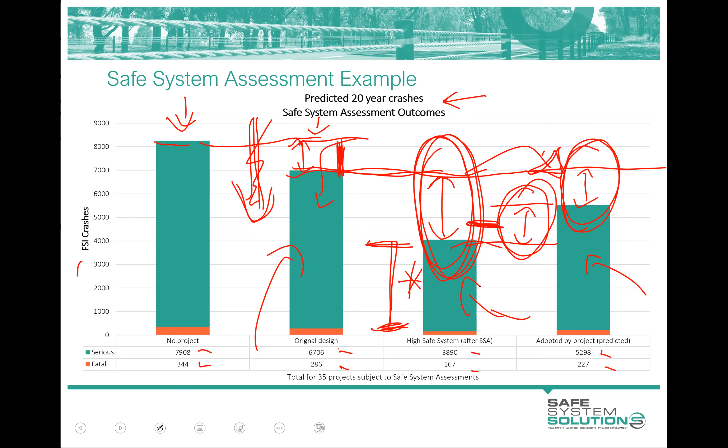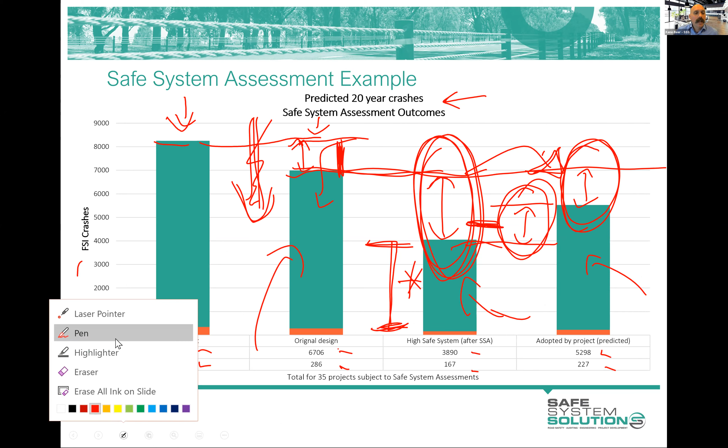Can you tell us what some of the factors are that influence the adopted by the project versus the high safe system assessment? Yeah, great question. So, the things we were seeing. I'm just going to clear my slide so it's a bit easier to read. So we're really talking here about, okay, the safe system assessment suggested something, and the project said, well, we're going to do some of that. We can't do it all.

And the ones that were adopted quite readily were often things like continuous barrier systems. So maybe the project opted for minimum clear zones, but the safe system assessment said, actually, you'll get far better benefit if you do continuous barrier systems along the road instead of the clear zones. So those things were adopted.

Where it often came to a challenge was minor side roads, and the safe system assessment recommending either closing those roads and making people go around to the grade separated interchanges, or recommending roundabouts or acceleration lanes at those minor intersections. So that was one.

Another one that was not accepted in quite a few of them were large signalised intersections, and the safe system assessment basically was saying you need to lower speeds through these, and some options are to do a raised safety platform, a signalised roundabout, or to grade separate. And then there were also supporting options like lower speed limits, red light speed cameras, and these sorts of things. So most of the time they opted for these lower order supporting treatments at these large signalised intersections.

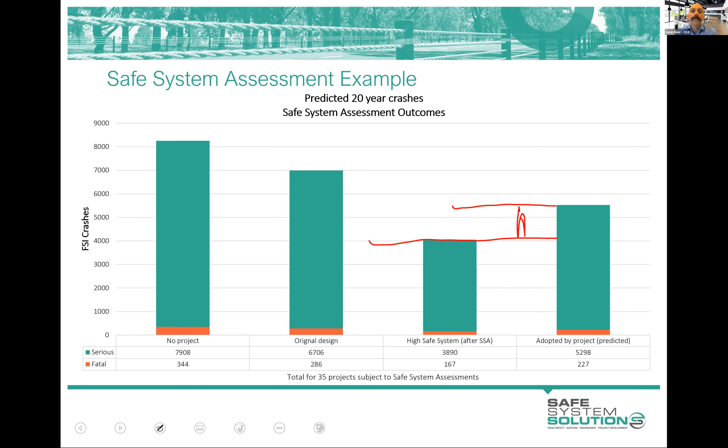Thanks, Ken. I think you can carry on. Okay. How are we going on time? Oh, yeah, beautiful. So just a couple of dot points here, a few dot points.

Safe system assessment benefits: a great way to determine projects' alignment with safe system principles. I think you've seen that. And it's a good methodology to compare project options or project design options. So it's a great way when you're in your optioneering phase and you go, we've got 4 options on the table here, and you can do those safe system assessments, you can get scores, you can see areas where projects are better and worse in terms of different road user types, different crash types.

Great way to obviously move projects closer to those safe system objectives of eliminating death and serious injury. Good method to assist planners, designers, and project managers to move the safe system approach from theory to practice. And I think that's probably its best application, because people are generally on board with the safe system at a philosophical theory level. Like, you know, let's improve road safety. Nobody should be killed or seriously injured. All of this sort of stuff, and it's great at a theoretical level.

And the real challenge comes at our end, the practitioner end, of trying to actually put this on the ground, and what does it mean? And so I just love the fact this tool really moves us forward in actually taking these theoretical aspirations, which ministers and chief executives love signing off, this sort of strategy, principles level stuff. But how do we put that on the ground? And safe system assessments are a great tool for that. And it's a good basis for planning of future road designs and infrastructure.

So let's get into a bit of the process guidance. And this question came up earlier, but when is it best to do a safe system assessment, and do you need to do it multiple times at every stage? So if you look at the stages of an infrastructure project here in grey: concept, draft, detail design, build the thing, and have it open and live to traffic and general operations of that road going forward. The safe system assessment is really great in these early stages: options, concepts, drafts.

Then once you've got a detailed design set, safe system assessment is not the best tool to use. We've tried that. I mean, it's provided some value, but the reality is that project's gone. It's going to get built pretty close to what they've done the detailed design on. We've done safe system assessments on your 500-page design set, which is all completed and basically ready to put out to tender.

And when you come back and your recommendations in the safe system assessment say, well, your intersection forms should be changed, we think you should do raised intersections or roundabouts, and they've got signals, the odds of them changing that are minuscule. It's too far gone. Those debates need to happen back up here, those inputs. So this is where road safety audits, I think, are a better tool. The audit is more picking some of the details of the project, tweaking things here and there, making those small, minute, detailed changes, which is really important to do still. Don't get me wrong.

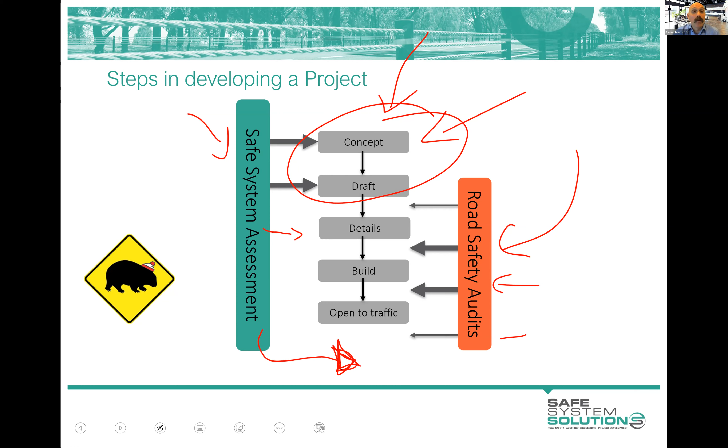Ken, a question here. Yep. Great diagram. Any thoughts on looking to apply or consider the safe system principles to policy strategy? For example, policies to offer free tow of stationary vehicles from high-speed, high-volume motorway shoulders in high-risk areas.

Well, the safe system assessment methodology has been designed to be quite adaptable, and you should be able to utilize the methodology to assess something like that. And it's been used for some varied projects out of the traditional mold. It's been looked at for program-wide initiatives. It's been used for remote communities, so covering a whole lot of area.

So in theory, absolutely, it should be able to be utilized for that. It kind of is a risk assessment methodology in its own right. So could you risk assess that? Yes. So could you use this tool as your framework for risk assessment? Yes, you could. It would need a little bit of thinking, but yeah, absolutely, it could be done.

Is that it, Kathy? Yep, that's it for now. Thank you.

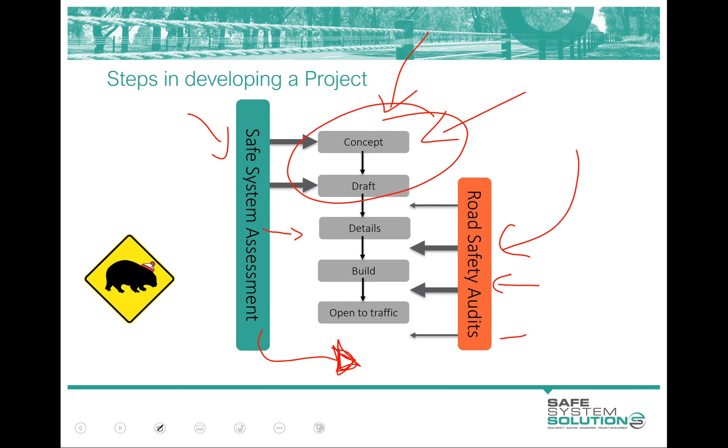The severity of crashes, I'm going to say sometimes for road safety audits, but definitely always for safe system assessments, you're forced to do that. The reason I say sometimes for road safety audits is that I just see a lot of road safety audits that ignore the severity of the incident that is expected to occur. So again, I just use the high-speed traffic signals, for example. The audit is rightly looking at all of these likelihood factors, but not questioning the speed of red light runners and those that make those intentional decisions or mistakes to run the red light.

And so there is sort of embedded in auditing your likelihood and severity, but it's just almost once you're into this scenario where someone's breaking a road rule, often in an audit, it seems to be ignored as a severity aspect. And exposure is not really taken into account as its own discrete element in a road safety audit. It is in a safe system assessment. In a road safety audit, it's just embedded in your likelihood, really.

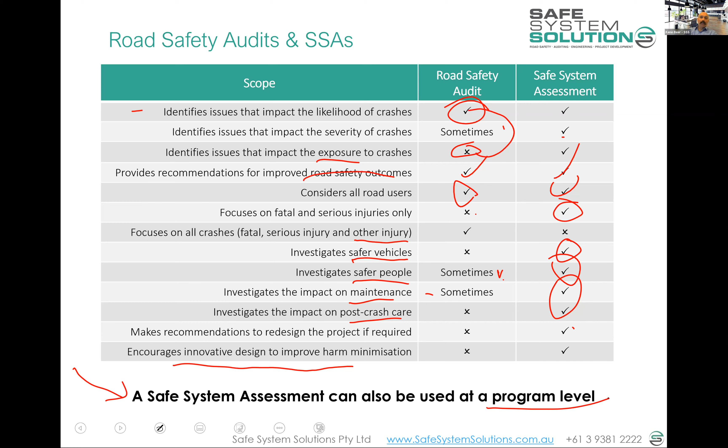So the process really goes, this is for an infrastructure project mainly, that the client determines, are you going to do a full or a rapid safe system assessment? Now, I think you guys are calling it a light. I think that's what Andrew said, light.

So safe system assessment type, full or Lite. I'm going to show you the difference between the two shortly. The assessment team is selected usually by the designer, the client, project manager, and they say, right, we have this safe system assessment done. Now it might be an internal TMR group that does it. It might be a consultant that puts together a team and comes in and does this independent assessment.

There's some sort of commencement meeting and then exchange of all of this information. What's the scope of the project? What's happening? What are the designs? What's the difference between these two? What are your aim speed limits? Who's using the road? What's the movement and place categorization? You're building that picture of the project.

Then you get out on site as the safe system assessment team and you look at the site, you understand how it's functioning, how it's operating, you build that picture in your mind, and you complete the safe system assessment matrix for the existing conditions and then any design options you give. You consider any of those other elements of the safe system through those questions that are pre-populated into the Austroads guide.

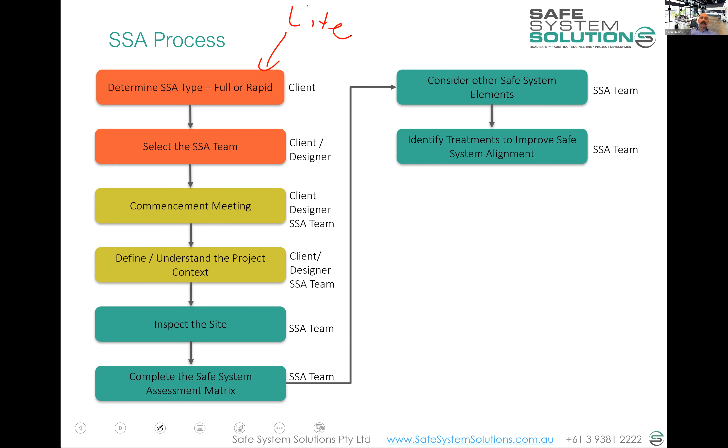You identify treatments to improve the alignment with safe system principles. So you take their design, you score it, you say, hey, if you did this, this, this, and this, it would really improve your alignment with safe system principles. And you write that all up into a report utilizing the templates available to you. So Andrew showed you your templates that are available, so you can utilize those, the Queensland ones. They're very much the same as the ones you're using currently for your assignment.

TMR based those off Victoria, and Victoria based them off some of Safe System Solutions' original reports anyway. So they're all running in the same direction. But just download the one out of that e-drive or whatever it was, and you can utilize that.

And then it goes back to the project team and the designer, and there's your information, there's your ideas, there's some suggestions, and they make any changes. And then amend the project and incorporate any changes. Now, at some point, they may say, I'm going to amend the design, and we'd just like that scored again. So that would then sort of come back to here.

You do another matrix, and then it'd come back to here. If there are any further improvements that could happen, then you might update the report just to reflect this one last new finalized treatment option. And it would flow down. I like doing that last step. I like saying to a client, well, there's our safe system assessment report, got your scoring, scored your design, we've made some recommendations, give that back to the designers, work with the designers, see what you can change, and then shoot us through that final design, and we'll just do one last assessment.

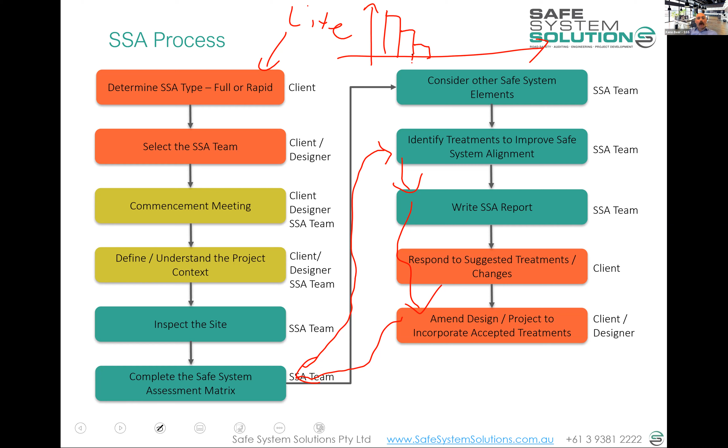The reason I like that is you get this nice graph to show your director and your chief executive and others, where it sort of says, this was the existing conditions. This was our original design, which was going to improve things. But we had the safe system assessment done, and it brought our score down to here. And that just sort of tells a nice story in my mind to show that you are doing everything you can to get the best alignment with safe system principles possible, as it is your organizational policy requirement.

Okay, I'll pause there for questions. And I don't know, do we want to stretch, break, coffee, fill up water break? Kathy, what do you think? Yeah, I think so. That's a good idea, Ken. We don't have any questions at the minute, so maybe we'll have a 2-minute break, and then any questions that anyone has can come through. Otherwise, yeah, a bit of a stretch. Okay, we'll give a couple of minutes then. Thanks. Shortly. Any questions arising there? I can probably look myself actually here. Okay, nothing new there.

Right. So hopefully you've got yourself a nice coffee or something there. I just want to point out a few things that are available from other jurisdictions, or how other jurisdictions are doing a few things, and what Queensland's up to. You've already seen from Andrew the tools being developed by Queensland. So Victoria's got a page from their safe system engineering area within government, and it's got the guidelines, templates that they have. Yours are available in your eDrive. It'd be good to get those on the TMR website so that your consultants can use them, but I'm sure you can provide those to consultants and the like.

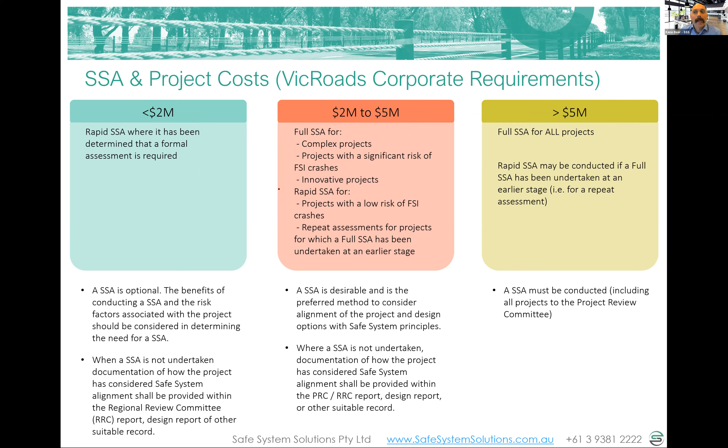And before I pause shortly to take any questions or comments, I just want to touch on what is generally seen as a full safe system assessment or a light, as you are calling it. Others call it a rapid, but they have commencement meetings, context, workshop, site inspection, all the matrices that you produce, all those other elements of the safe system pillars and the questions that are in the Austroads and the templates.

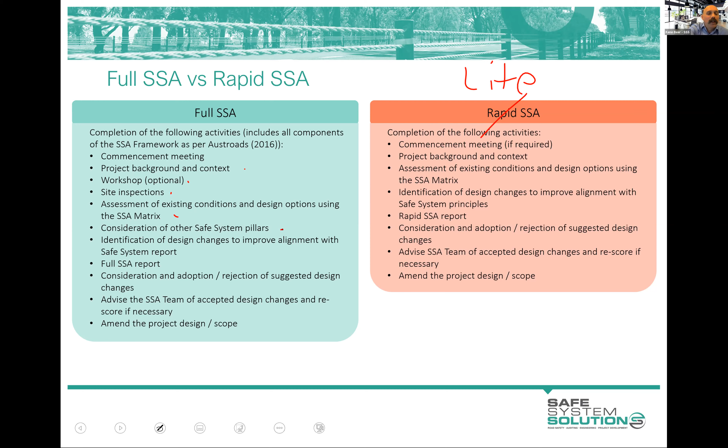It suggests changes. You do the full report, which you just download the full report template and changes, and you can have that feedback loop as well, and any changes to the design. So that's the full process. What then gets sort of removed when you go into a light is you don't necessarily need to do workshops. Now, it is sort of still optional in the full one, but that's one that goes.

The site inspection can be removed. Now, I still like to do a site inspection even for a light or a rapid, but it's not sort of mandated. The idea is that it could be done a bit quicker at desktop level, looking at the design, looking at existing conditions from Street View and things. Now, I just feel, I don't know, maybe it's just me. I love getting out to the site to see it, to feel it, to understand what's going on. But that's one that's sort of been possibly removed there.

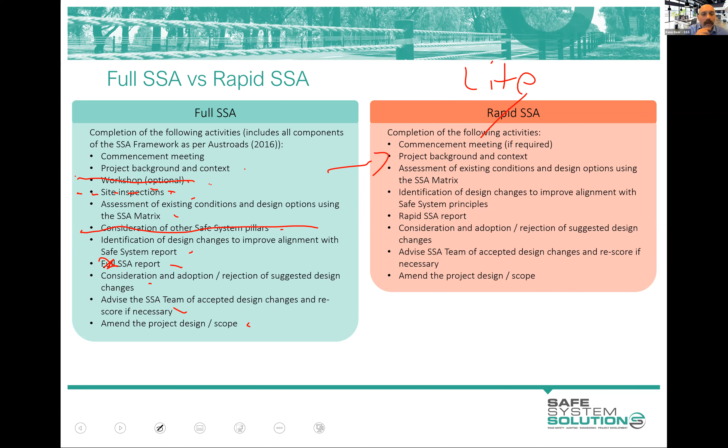The consideration of other elements have been removed. So you don't have to go through and answer those other questions about the vehicles, the people, the post-crash care and all of that, and document all of that. And obviously you do a light report, not a full safe system assessment report. But apart from that, it's about the same.

I sort of say my rule of thumb is sort of 60 to 70% of the effort is the light compared to the full. So it's not like you're swapping a 2-week exercise for a 1-day exercise there, but it's a couple of days to do a full safe system assessment with your site inspection, you're writing up and you're documenting and everything like that. And you can probably knock off half a day of that with going the light version, depending on the project,

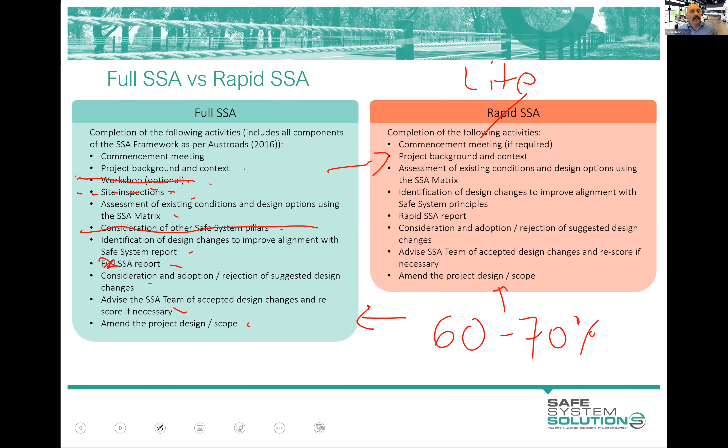obviously. If it's a big 15 kilometers of duplication, it's a longer process. If it's some line marking changes, well, I'd question why you're doing a full safe system assessment on it, but maybe it is what you want to do. And then it's a quicker process. Questions before I just cover off some final road environments?

No questions at the moment, Ken.

Okay. Well, the reason I want to do this final little exercise of just going through a series of road environments and briefly talking about how we can get better alignment with safe system principles is because we've asked you to do a safe system assessment as this training on one specific road environment. And when we finish the course and you submit an awesome safe system assessment report and finish all your quizzes, we're going to pat you on the back and hand you a certificate and say, off you go do lots of safe system assessments. And you can be doing safe system assessments on any road environment.

So we just want to briefly touch on a raft of road environments, road stereotypes, and talk about some of the features that you might be recommending in your safe system assessment report to elevate them in terms of alignment with safe system principles. So the road environments we've generally categorized here are residential, strip shopping centres, mixed-use arterials, low-volume rural roads, high-volume rural roads, high-volume outer suburban arterial roads, major urban freeways, and major rural highways.

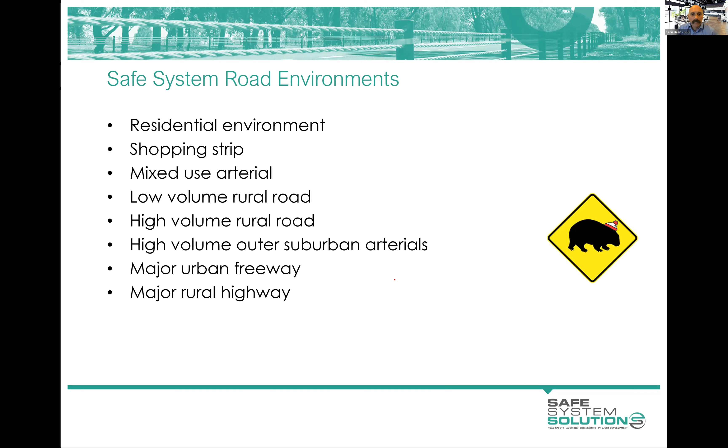Why don't we get you to just type in a few ideas? What would you possibly recommend as a safe system assessor in your report? So, maybe you were just asked to do existing conditions and make some recommendations on how we could get better alignment with safe system principles. And I've got one that I've just jotted down here. And the first, if anybody writes in the same as me, now you don't know much of the context of this and things like that. Also, maybe tell me if it's going to influence exposure, likelihood, or severity.

Okay, I've seen a couple come in already. Thank you. Some good ideas. I'll give you a second here, just as other stuff comes in. Thanks, everybody who's jotting stuff in. Some good stuff coming in. Thank you.

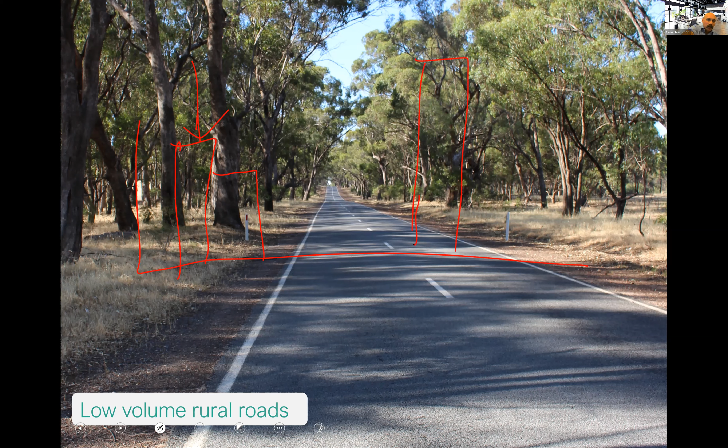But you could do a 20-year one, and then you'd do a 20-year prediction on existing conditions, so your volumes would go up, and a 20-year prediction on future, and that can take into account changes in the function of the road, massive new developments, opening up a new business park or whatever it is, and you can assess that as a comparative option in your 10-year, 20-year, 30-year or 40-year, whatever you want to do. You can just compare. And that way you can compare apples with apples, because that's an apple and that's an apple, and that's an orange and that's an orange.

That makes sense. Yes, it does.

How can we encourage councils to develop people areas away from the major roads in their planning schemes, particularly in areas where a bypass cannot be created? That's a great strategic planning question, isn't it? There's an Austroads document called Safe System in the Planning Context. It sets out some pretty basic principles around that sort of stuff. It's not a bad document, but I'm not sure it tells you directly how to alter them. I'm not sure I have great answers for that.

You're probably going to have a say in some of the planning schemes, and getting in there and being clear with those planning schemes and the objectives and how they're produced is probably the best lobbying option at this stage. We did play around with some safe system assessments on planning schemes at one point in the developer guidelines. It wasn't really the most successful clear-cut project. I'm not sure that helps a huge amount. Maybe others have got good ideas on that. Probably one worth chatting to lots of people about.

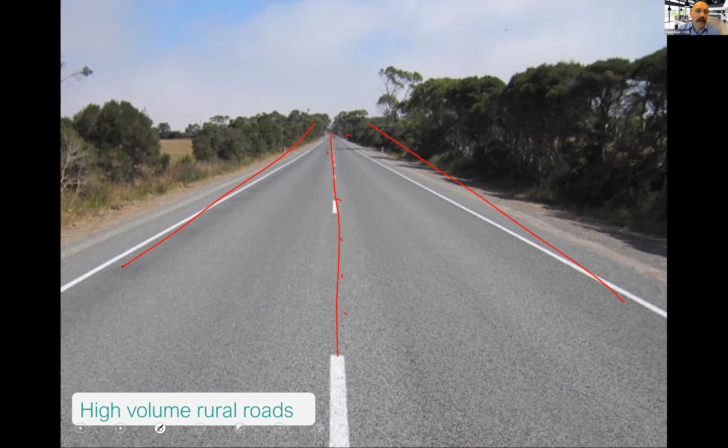If you've got high-ish volume, just addressing likelihood ain't going to cut it. Got to start hitting that severity of crash outcome, and on really long routes like this, barriers will be your only way to do that if you want to keep speeds high. And if you do have central barrier systems, you can utilize your intersections as nice turnaround opportunities, for anybody coming out of their properties, a nice place to turn and go back.

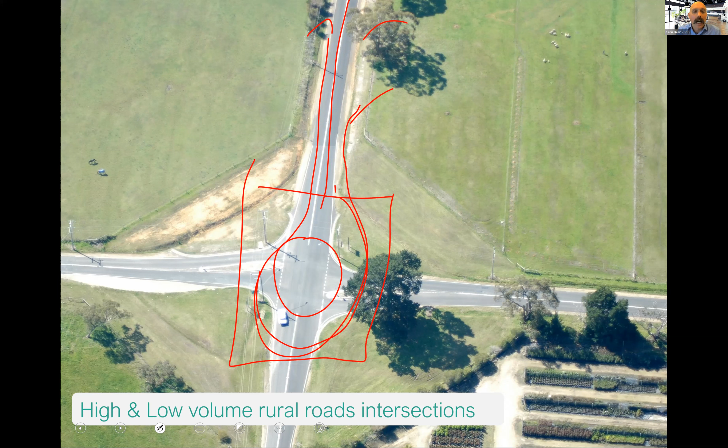Or you can look at ways to reduce speed through intersections, reduce likelihood of crashes and severity of crashes if they do occur. So maybe side road activated speed zones, obviously doing the normal things we do to improve the likelihood. So good sight lines, lighting, turn lanes and the like. But yeah, thinking about that severity as well.

And our high volume outer suburban arterials, well, when they've been identified as a major traffic route and traffic is priority, then it's about trying to restrict vulnerable users accessing the road. So you certainly don't want to have things like bike lanes on high-speed arterial roads, dedicated bike facilities off the road. You'd actually be doing more restricting of pedestrians in all possible ways.

But at your intersections, you're going to need to manage speeds between vehicle crashes, but also at the points where pedestrians may be crossing. You've got to expect people are going to run the red lights, try to work out ways to accommodate that and have it not result in death or serious injury.

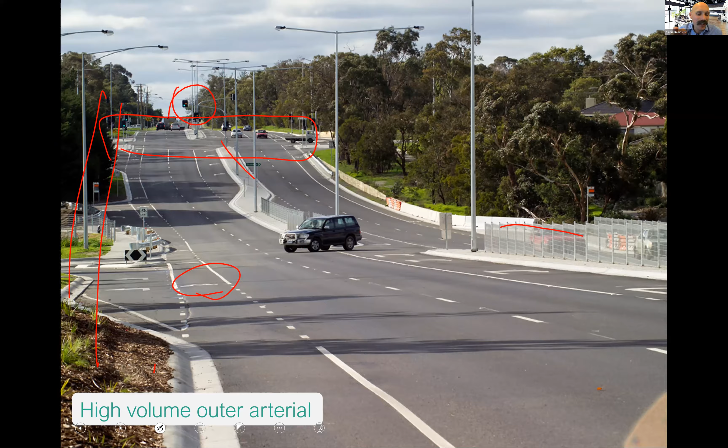And major freeways, urban motorways, well, these roads traditionally operate really quite well aligned with safe system principles. They've got separated flow, they've got no nasty right angle intersections. Things operate pretty well when they're free flowing. When they're absolutely stuffed, completely saturated, broke down, they operate pretty well from a safe system perspective as well, because all the crashes are minor, scrapes, rear end, and the injuries are very low.

It's as the freeway flow breaks down is where we see the sort of non-aligned safe system times. And that's because you've got the speed, but then you've also got the turbulence and the like. So what gets us better alignment with safe system principles in these environments is the management of the motorway.

So freeway management systems, so ramp metering, systems to proactively reduce the speed as you see the freeway is starting to get to a point of breaking down, and you proactively reduce speed limits, warn of congestion ahead, and you're really trying to reduce the likelihood and then the severity of these sorts of things and bring that down. And obviously trying to restrict vulnerable road users from these environments.

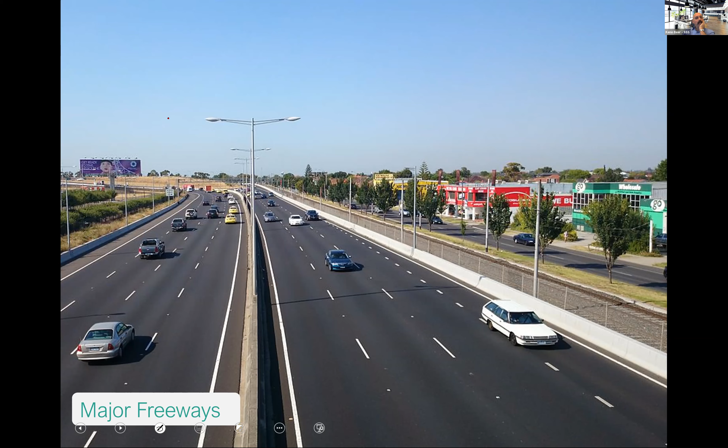And just finally, major rural highways, full containment of barrier systems along these is where we're going to go. Really, we want to have the bumper bowling of roads because people are going to fall asleep, they're going to get distracted, they're going to leave the road. And they're going to hit stuff and they're going to roll over and they're going to get to the other carriageway. And we need to intervene and address the severity and get that severity score down, and the likelihood score as much as we can.

Usually the likelihood score on these sorts of roads is actually quite low due to really good infrastructure, great geometric design, shoulders, often audio tactile, and we're just not addressing that severity for those smaller few that still do crash.

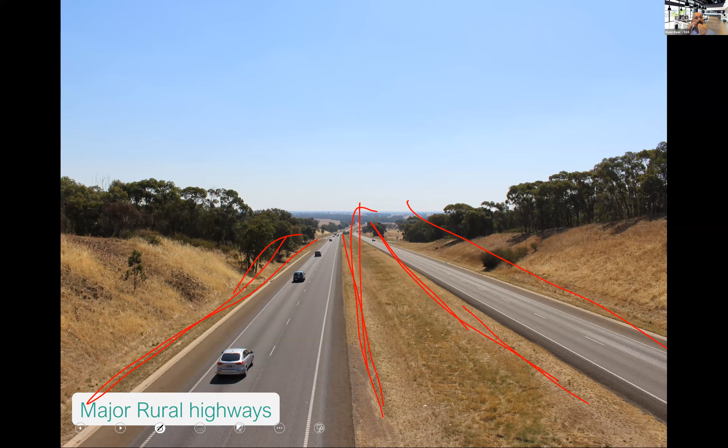And obviously the intersections on those, either grade separating, providing acceleration lanes and maybe U-turn facilities with acceleration lanes down the road. So you're getting a change in speed that is low and the severity is low. Otherwise, other things to try to reduce the likelihood of crashes. But I think I've sort of lightly touched on all of those. I think you know the process. You'll be able to do that very well for any road environment.

And of course, we're here to help and happy to send info, have a chat with you if you're doing a safe system assessment on something weird or unique. Maybe we've done one similar. Maybe I can just help you out, point you in some direction and stuff.